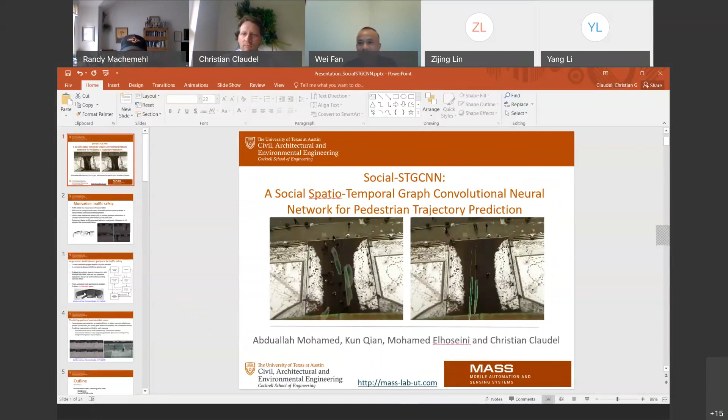As many of you know, CAMMSE is a 5-year multi-campus Tier 1 university transportation center funded by the U.S. Department of Transportation that began operations in November 2016 under the FAST Act. We are a consortium of 5 universities, including the University of North Carolina at Charlotte as the lead, the University of Texas at Austin, the University of Connecticut, Washington State University at Pullman, and Texas Southern University.

Today, we're really delighted to have Dr. Christian Claudel as our speaker. Dr. Claudel currently serves as a transportation engineering assistant professor in the Department of Civil, Architectural, and Environmental Engineering at the University of Texas at Austin. He received a master's and a Ph.D. degree, both in electrical engineering, from the University of California at Berkeley in 2009 and 2010, respectively. He specialized in cyber-physical system monitoring and the use of wireless sensor networks for environmental applications. The topic that he's going to present today is a social spatio-temporal graph convolutional neural network for human trajectory prediction.

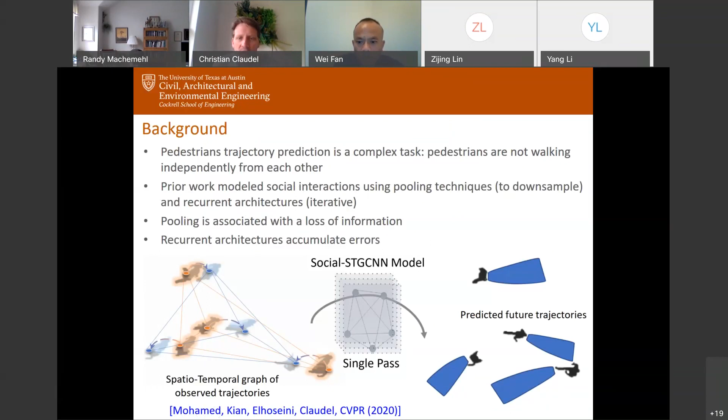We don't use much past information. We don't use what these people did half an hour ago. We use only the past, I believe, 2 or 3 seconds of data, to predict what they will do next. So this is again what I just mentioned, and the interactions of users are modeled using this graph, so that's the key novelty. And then the predictions are done over a certain time horizon, but not frame by frame or with intermediate time steps.

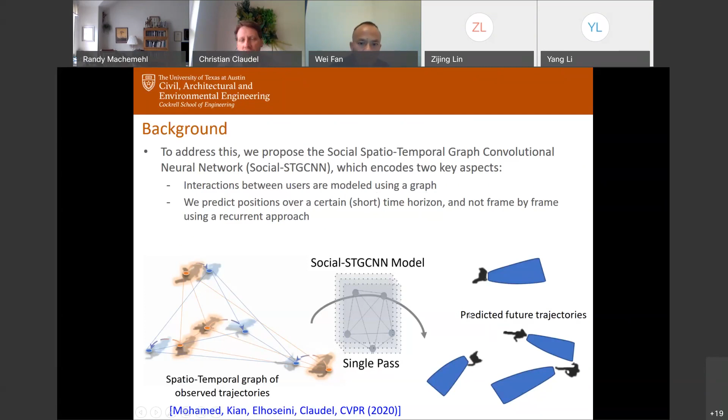We're going to build the graph, so you can see the graph connecting the users at the first time step, then the graph connecting the users at the second time step, and the graph connecting the users at the third time step. And what we built was an empirical adjacency matrix kernel function that would model the interactions between pedestrians. So that's where a little bit all the physical intuition goes.

So we have a certain set of parameters that are in these graphs, edges and vertices. So we have a bunch of information that flows there. And what we are doing is we are using some function to approximate the interactions that they will have. So here we use some information that is based on the coefficients that represent the positions here, but not just the current position. Of course, it represents the sequences of positions as well.

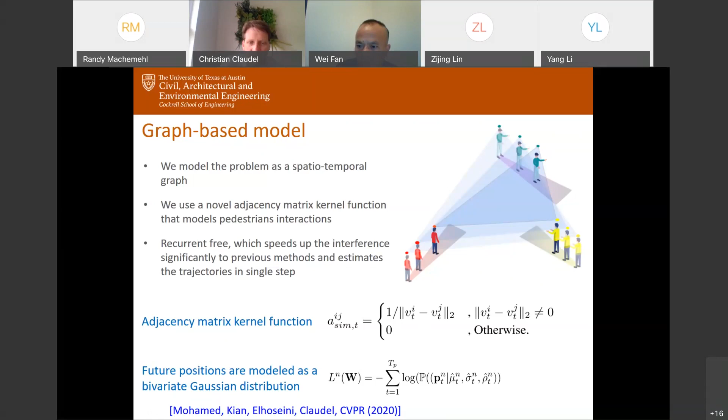And once we have that, we have now a graph of where people are. So then we create this graph convolutional neural network layer. So this is the novelty of the algorithm. And so we embed everything into a graph. We then use the time extrapolator. That was the name coined by my student Abduallah Mohamed.

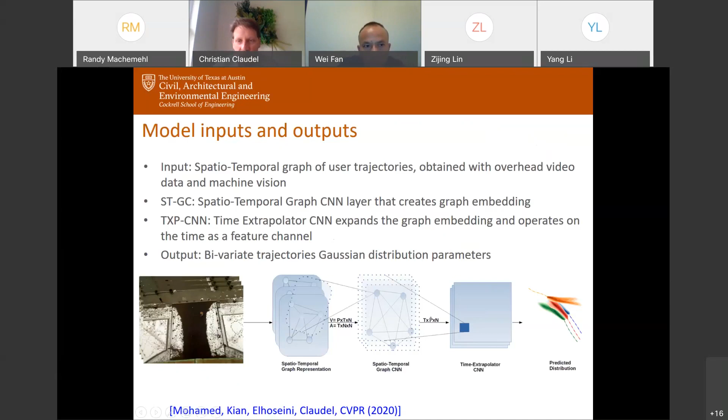And so here the time extrapolator is essentially a way of saying that we are not predicting over a single horizon, but we predict over a series of horizons at the same time. Once this is done, what we get as an output is the predicted distributions. So we start with an input that is just positions. And at the end, what we get is, starting from the position of each user, what are their predicted paths in the future? What are they up to according to the algorithm? Again, the algorithm is not perfect, but that's what we try to achieve.

And then after some time, we try to predict. So we use essentially all this past information of what they were up to that point, to predict now what will be their paths for the future, again, according to the algorithm. So here you can see that we predict that people will keep walking together, and that's something that is reasonably realistic.

Now, just a word about quality. It has been very interesting to see that people in the machine learning community have been working at trying to make this algorithm work in the best way they could, without necessarily comparing to very simple naive methods. And a naive method here is to use people's current position and speed and just keep going forward, saying, okay, let's assume that people keep their speed all the time. Where will they be next? And with that you can predict what people will do next.

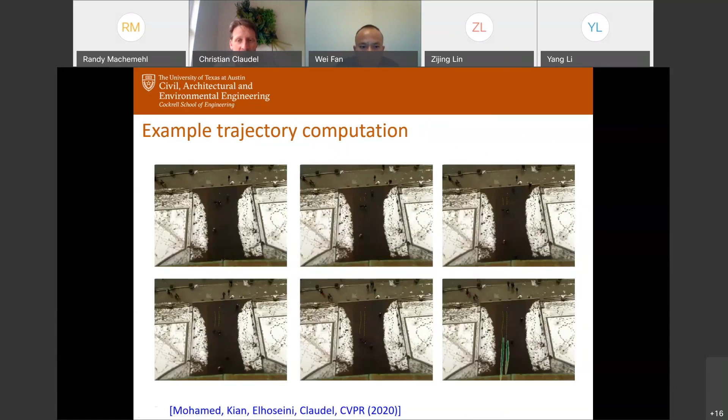And that's also something that was noticed by my two PhD students, Abduallah Mohamed and Kun Qian, when they looked at this problem from a human standpoint. They tried to infer better than the algorithm, and it's actually quite difficult, because many times it was very hard from looking at the video data only to know what people would do next. So there is obviously a limit. I think humans are the best at predicting this. So we have to stay realistic and realize that machines will never be perfect at predicting this. We can at most achieve, I would say, human level accuracy as we progress on this topic.

Okay, so now let's compare this algorithm, Social-STGCNN, with state-of-the-art algorithms. What we did is we took 5 large data sets, corresponding I believe to hundreds of gigabytes or terabytes of data. So that was really a lot of data to process. We extracted all these human trajectories from these data sets using classical machine vision algorithms. And then based on these positions, we measured the performance of the algorithm with 2 metrics. The first metric is the average displacement error, which means that, summing along the trajectory, what was the average error that we are getting in the least squares sense?

I mean, in the norm 2 sense, between the positions that we are predicting and the actual position of the user. So that's the average error. And finally, the final displacement error, sum over all the agents. Here we sum the errors that are at the final time only. So we don't look at the intermediate errors, but we just look at the final error at the end of the time horizon.

We also analyze other things. So things that are important in machine learning are also parameter efficiency. So how many parameters do you need to do the prediction? The lower amount of parameters, the better, because that means it will be more robust and it will also take less time to compute. We also analyze the data efficiency of the algorithm. So that's also something important.

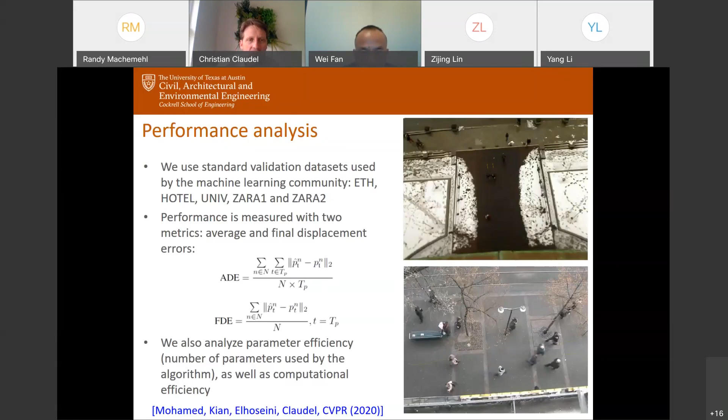So you have this linear algorithm, which is really the simplest algorithm that I just discussed. It amounts to taking the current trajectory of people, the current speed, and then predicting what people will do next. So it's really something very basic and simple. But you can see that the performance is already not too bad. Of course it's twice worse than what we have right now, but it's still reasonably accurate.

Then you can see all these algorithms that were reported in the literature, and the algorithm that we propose has a better performance in average across all these data sets. Sometimes it's not performing perfectly, but in average the performance is definitely better than anything reported. In average, we get a 20% lower error in average displacement error and a 2% error in the final displacement error. Even though it's not a lot, it's still significant statistically, given the metric and the amount of data over which we have tested.

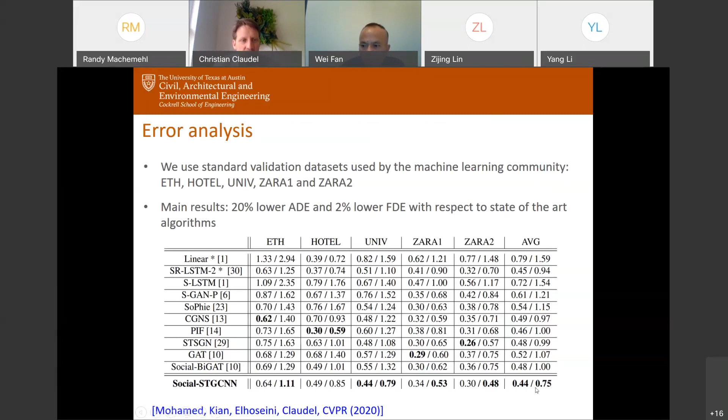The problem of machine learning also is that it's diminishing returns. As more and more algorithms are proposed, it's harder and harder to improve over them. Then we analyze the parameter efficiency and the computational complexity. Parameter efficiency means that we want to have a lower number of parameters. And here, that's really where the proposed algorithm is making a difference. We are a little bit better in terms of error, but the main advantage is that we need much fewer parameters than what other reported algorithms need.

And you can see here that if we compare with the previous algorithm. So I believe there was a question here that was asked. Sorry, let me just go back here. I'm not sure how to access it because I saw some very quick text that disappeared. Okay. So I think I will answer the question probably at the end, that might be easier. Right. So let me just go back to my presentation.

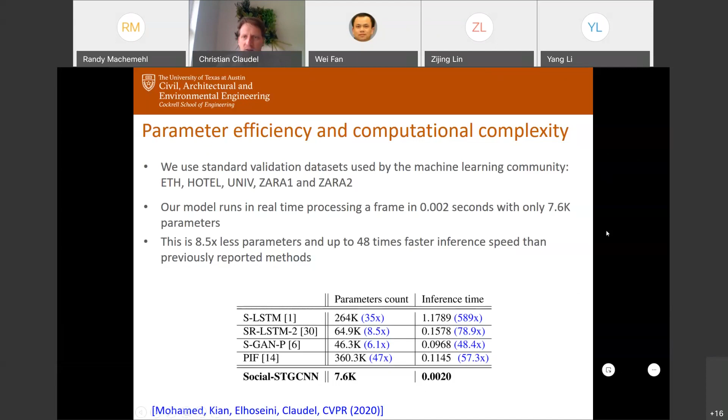Right, so let me just go next to data efficiency.

So I just don't get any feedback, so I'm not sure. Am I still connected? Okay, I see. It seems that everything is connected, but we get the confirmation. Okay, everything is fine. Okay, I can hear something. So good. All right. Sometimes I have internet. I just want to make sure that I'm just in track here.

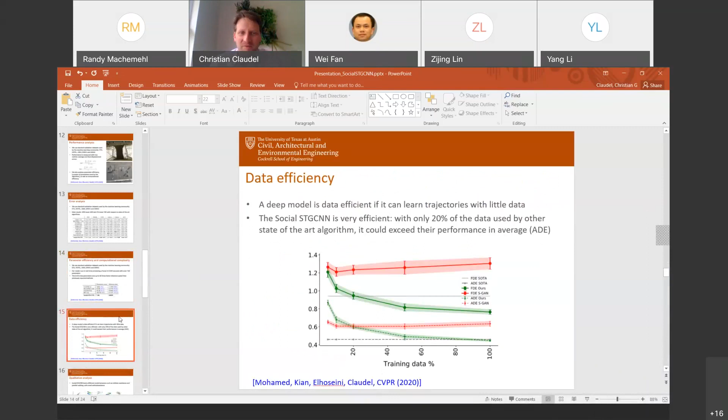Okay, so then data efficiency. So data efficiency, again, is related to the ability for the algorithm to predict with little data. So what we want is the algorithm to learn quickly how to predict these trajectories with a small amount of data. And here, that's also something that is very interesting for the algorithm that we have introduced. We need only, on average, 20% of the data used by state-of-the-art algorithms to exceed their performance.

So, for example, here, we compared this with generative adversarial neural networks. So it's a particular type of neural network that is usually learning faster. So it's really a great advantage of GANs. You start really with a fast convergence very quickly. But you can see that with only a small percent of the data, we already exceed that performance.

So that's really something that was very interesting for us. And we saw that even for a very, very small amount of training data, we already exceeded the performance of the generative adversarial neural network. So it's really some commendable results. So that's for the description of the algorithm.

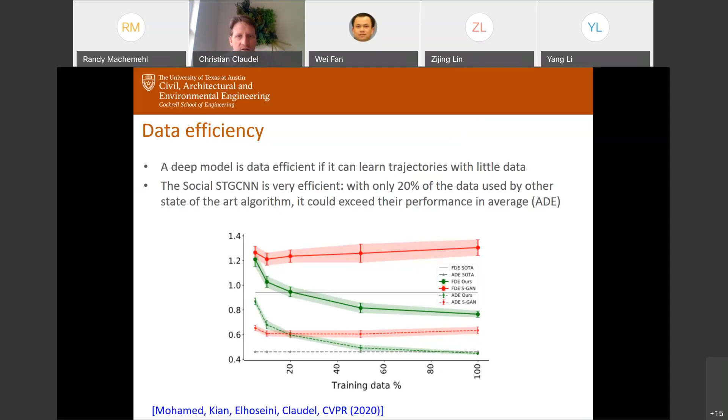Now let's discuss a little bit more about qualitative analysis. What does the algorithm predict in the end? So it's hard to describe everything here. I just made 2 slides to show some example results, but of course it's hard to summarize in 2 slides what happens in tens of hours or hundreds of hours of video data.

Obviously, I don't show here necessarily the bad results, and there are some bad results in machine learning. Because it's a black box, it might work very well 99% of the time, but there might be some errors the rest of the time. And we all know that autonomous vehicles, for example, are not perfect because they might work very well in demos, but it may be that if you have the right sequence of events, the machine learning is giving you very, very bad advice or a very bad prediction.

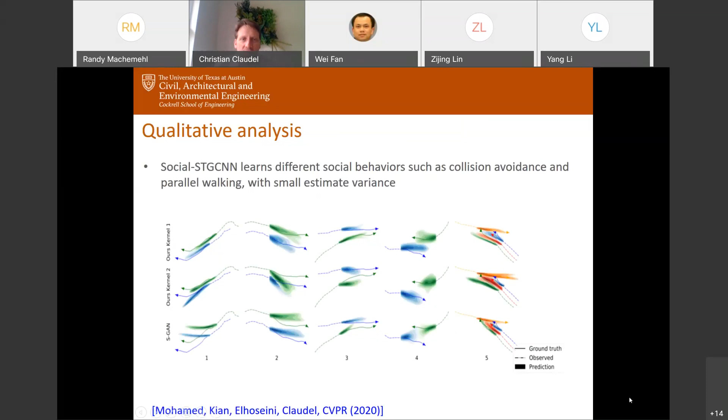And we can also model more complicated interactions with multiple users, where we see also that people tend to move away and people here tend to walk together, but again, not colliding like what is predicted by the SGAN algorithm, more something where all 3 people here are walking together and steering clear from that person walking in the opposite direction.

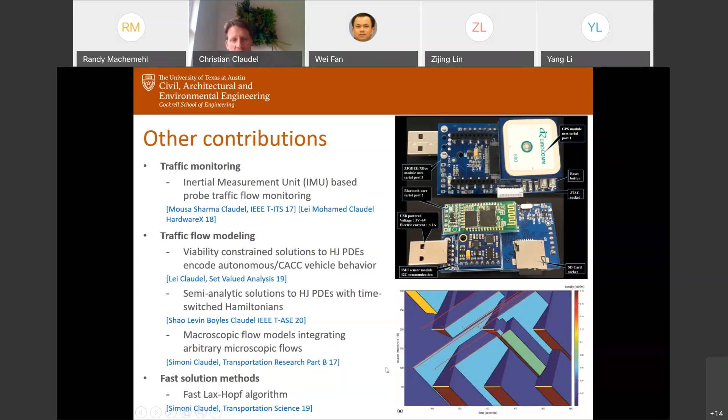Applications of this work that I just mentioned. So this is state estimation, how to estimate the state of traffic on the highway. It's again a density map, and this is space and this is time. So how to predict based on measurement data, how to control traffic.

So we have worked on optimization of delivery vehicles, of buses. So here this is modeling bus bunching and trying to minimize bus bunching using again PDE flow models, and how to control them in real time so that they don't bunch. We have worked also on other control parameters, more control of flows, so how to do boundary control or control of speed limits to optimize traffic flows.

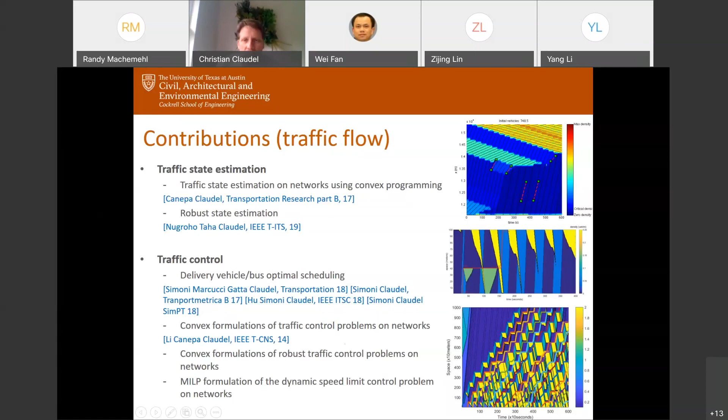Now, more closely related to what I'm showing here, we have also worked on the control of unmanned aerial vehicles for some applications, and this application is flood monitoring. There are lots of people that have worked on UAV control for traffic monitoring. In fact, we have worked on this as well with Professor Boyles at UNC. Here, this project is more about how to use a set of UAVs and how to control them for floods.

So it's somehow related to this problem that we had here. However, it's a control problem. It's not an estimation problem. We try to control agents now, and we don't try to estimate what they'll do next. And the big difference also is that here we are using a partial differential equation to model the flows. So this is the watershed of Austin.

And we try to use here the partial differential equation, the shallow water equations that describe how the flow will propagate in the river here, and we try to essentially use that information together with the topography map to determine how you should steer the UAVs.

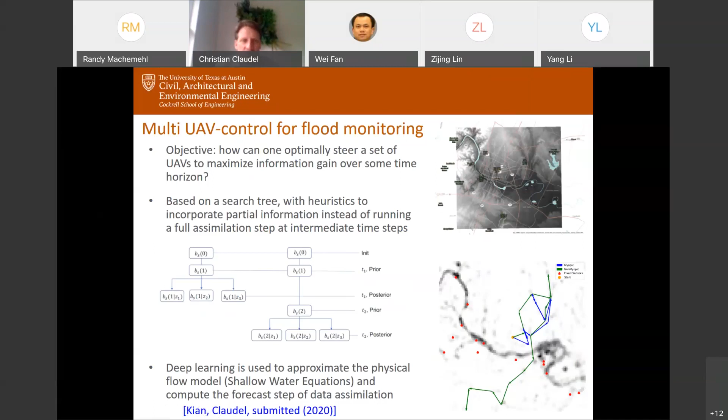So if you have a set of UAVs that sense floods, how should you steer them to maximize the information that you gain over some time horizon? So imagine that you have a flood that's coming. You don't know if there is a flood at all, but you have just 5 UAVs. How should you assign their path in order to maximize the information that you will get, for example, over 10 minutes, and to get the most complete, most accurate map of the current situation, right?

Some other research works. So here, the Hyperloop team of UT. That's something that is in parentheses, obviously, because of the COVID, but we had worked a few years on how to make Hyperloop systems. We have participated in 3 competitions of SpaceX in the past 3 years. And actually this year's competition was cancelled by SpaceX way before the COVID situation. So I don't know if they predicted that in advance, but this is really surprising. So we couldn't participate in this competition.

This year there won't be any competition, but we hope that there will be competitions in future years, and we are still working on how to make a pod that is using air bearings. So it's one of the few pods available that use compressed air to try to float and to be essentially a system for transportation.

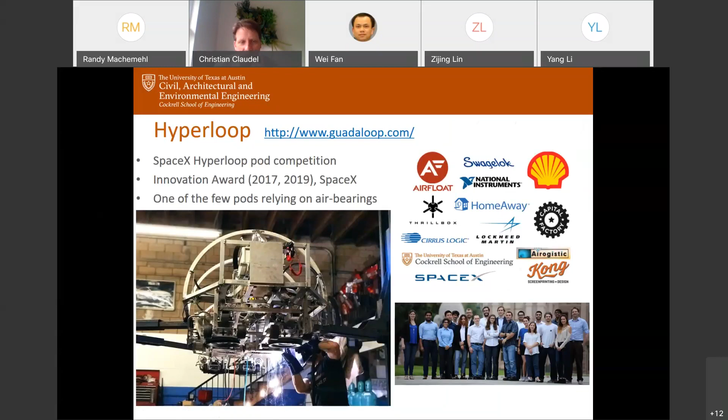All right, so now let me just quickly conclude this work. So what we presented here was the Social-STGCNN, an algorithm that can be used to predict trajectories in the future, to predict pedestrian trajectories, of course, in this work. But what we would like to do is to extend it to any other application. So predict what drivers will do, what bicyclists will do, what other modes of transportation will do.

Of course, in the case, for example, of drivers, you would have more information potentially that would come from the car itself. For the pedestrians, we only can get information from cameras that are filming overhead. But for other vehicles, we could also share information, because all these new vehicles are filled with sensors. You could have also information from the driver itself, because with inside cameras in a car, you can know what people are looking at. You can know their head motion and so on and so forth.

So with all this information, you potentially have even more accurate predictions of what drivers will do than what we can get with pedestrians. Each time you get more information, you get a system that is more efficient and safer. So what we want to do is to implement this algorithm in the future to try new paradigms. And we also want to extend this algorithm to partially controlled situations. In the situation that we had here, we don't know what the pedestrians will do next, or what they are supposed to do in the future.

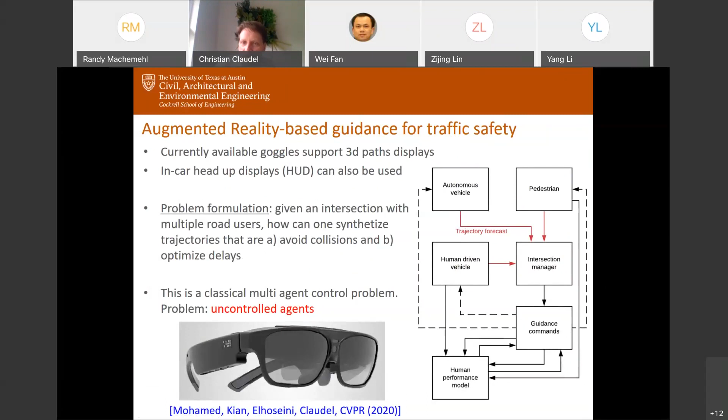However, if I go back to the original slide here, remember what we want ultimately is to have a system that is controlled. We want to have an intersection manager that issues guidance commands, and the guidance goes back to everyone: to autonomous vehicles, to driven vehicles, and to pedestrians. So here, if you have a pedestrian that has some guidance information, how can you now know what they will do next? You know what they are supposed to do next. You tell them, go there. But what are they going to do next?

Between what you should do and what you will do, that's not the same story. And you have some slight deviations. Obviously, you have people that don't track their trajectory very well. You have people that will do something else, that will forget about it. You have the same issue for drivers. If you tell drivers what to do, there are some people that are distracted, that are not paying too much attention, or some people that are just not very good at driving, that will not be very accurate.

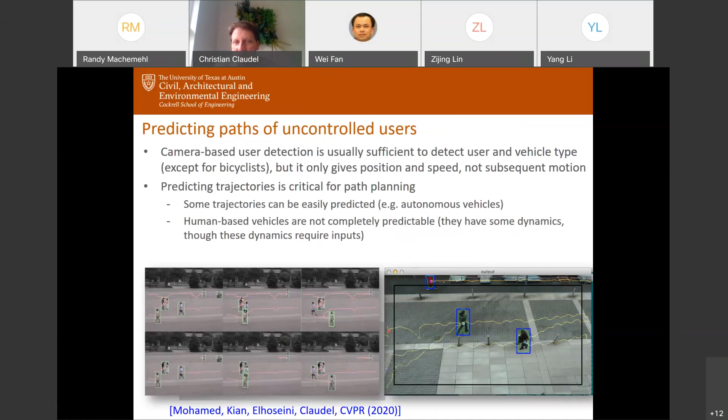So all this information is something that we would like to predict as well, because that's the second part of the system, predicting what people will do when they are supposed to be controlled. And if you put them together, now you can have even more realistic and more accurate trajectories and potentially increase the performance of the system. That concludes my presentation for today, and I'm ready to answer any question.

Okay, thank you, Dr. Claudel. It's a great presentation, huh?

I think we have one question here. I think the question is, how did the model include the interactions between pedestrians? Is it possible to revise the predicted trajectory of pedestrians in order to account for the collision avoidance behavior among pedestrians when there is a conflict between them?

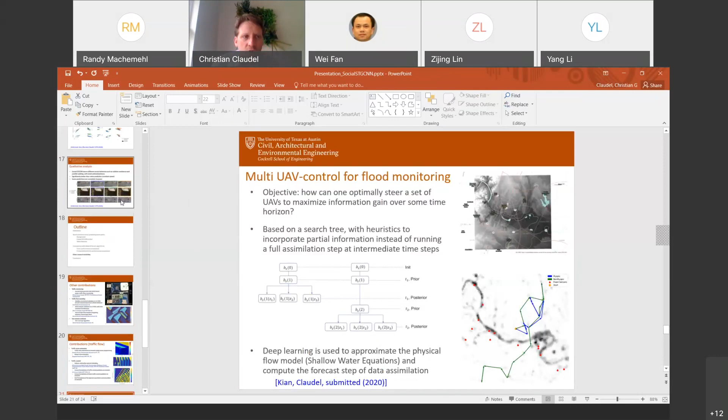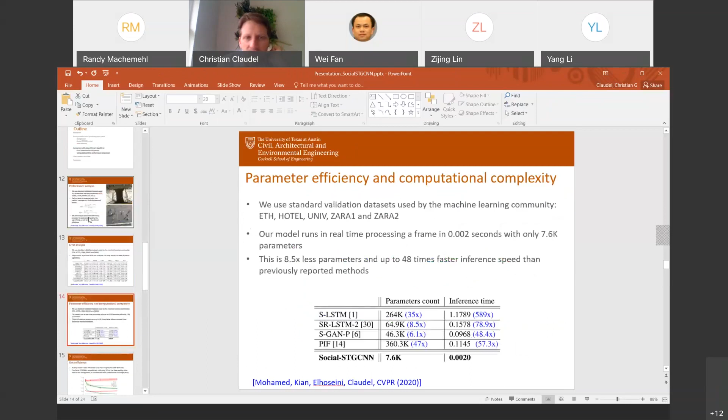Yes, so we take that information into account, as I showed on this example here, for the qualitative analysis. We try essentially to learn these social behaviors, the collision avoidance and parallel walking and other behaviors as well. So right now, these behaviors are taken into account through this kernel function for the adjacency matrix. So if I go back in my slides here, we have these functions that take into account

these interactions. And because we have a sequence of past data that we use to predict the future, we essentially determine if, for example, people are walking together, it's fine, they are walking together. If people are on a collision course or they are walking on the side, we also have the corresponding information because we have a time varying function here. That's through this information that we try to predict what people will do next.

There would also possibly be other information that we could take into account, and that's also something that we could do in future work, which would be to take into account also simply the scene that we have as well, because there are some cues, some body cues, etc., that people have that also give a lot of what they are going to do next.

So that's something that is very complicated to do with state-of-the-art algorithms, because it's very difficult with currently available algorithms to, for example, detect the gestures and classify the gestures or the head motions and so on and so forth. That's something that you can do as a human very easily, but machines still struggle to do this correctly. But I think that would be a very interesting development if we can achieve this.

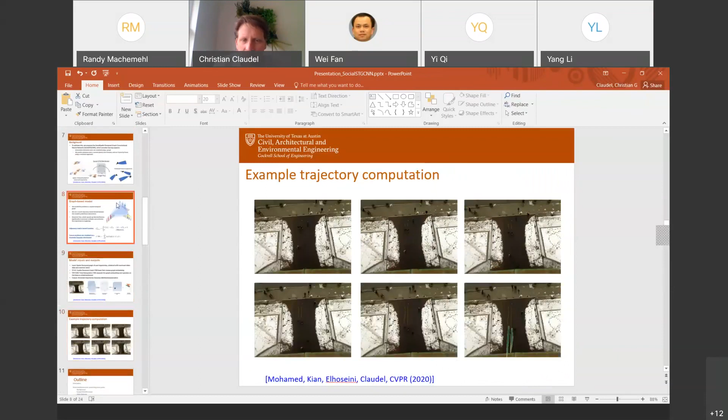It's a very interesting research, and I think it's also very challenging, right? As predicting human beings' behavior is not easy. So I have a small question about when you build your model, because you introduced the background, the overall motivation for your research is to try to use your results on collisions in the future when we implement the autonomous vehicle, because autonomous vehicles will interact with pedestrians.

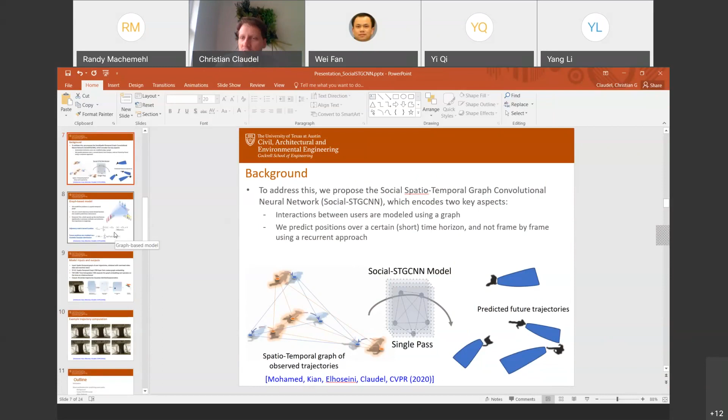So my question, do you think about the impacts of vehicles on pedestrian behavior? When the vehicle is close to the pedestrian or approaching the pedestrian, their behavior may be different. For example, they will be closer to each other, try to yield to the vehicle. That's right. That's a very good question, and in fact, that's related also to this. I mean, that was our primary motivation to put this adjacency matrix kernel.

Even though, unlike what you mentioned, we haven't tested that in a situation where we have a mix of pedestrians and vehicles. But we expect that with pedestrians and vehicles, through a proper adjustment of this function, we could take into account the interactions with vehicles, and for example, the fact that people are afraid of vehicles, especially when vehicles are closing in fast. All this information, I believe, could be encoded by the same type of adjacency matrix function.

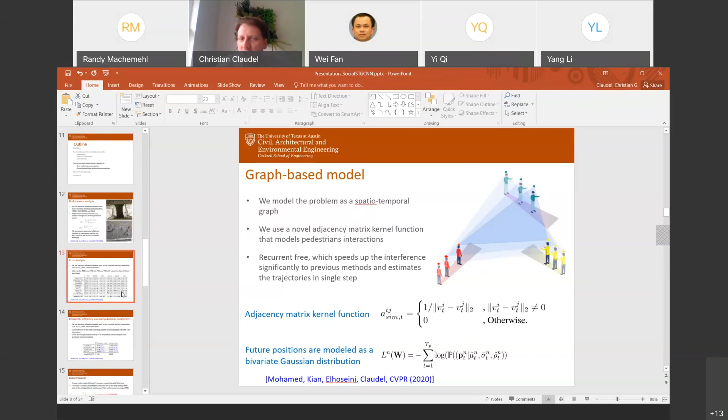The only problem is that we couldn't test it very well because everyone doing the testing in the machine learning community uses these 5 datasets, and these 5 datasets are purely pedestrians. For example, I believe this one was at Stanford, if I remember correctly, and it was just an overhead camera monitoring a purely pedestrian crossing within the campus of the university. So there was no car involved, just bikes and pedestrians. But I think definitely that would be a very important thing.

That's where I believe learning can help to predict what people will do next much more accurately than simple naive models that would take into account just the current speed and positions. Because we all know that even if you haven't seen the car, as soon as you hear something, you see something in your vision, you're gonna move back, and that's something that can probably be learned as well.

Thank you. Very interesting. Thanks.

Okay, thank you, Dr. Qi and Dr. Claudel. I think we have one more question, which Brandon raised. So have you looked into multimodal output?

Multimodal output. So here, I'm not very sure that I fully understand multimodal. Oh, you mean in the sense of multiple distributions in the outputs? So not to have a single mode, for example, for the Gaussian. Okay, yeah, perfect. Yes, definitely that's something that we also tried. We tried to use a Gaussian mixture model where we have multiple modes, and definitely that's something critical.

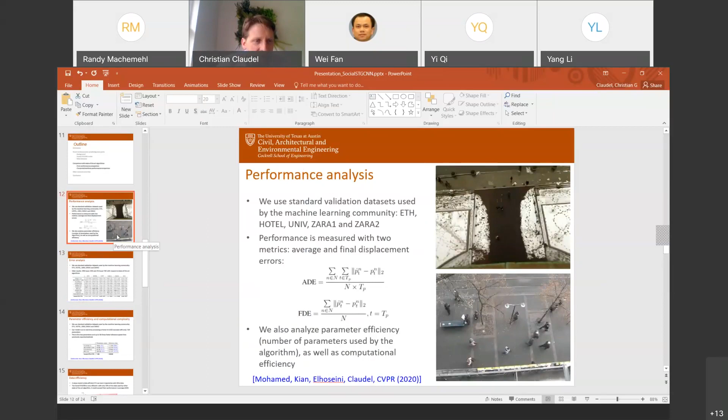But definitely that multi-modal thing is very important for the future. Particularly, for example, if you have someone next to a crossing, are they going to cross, or are they going to stay, or are they going to walk back again? There are lots of situations in which things branch. When you have a bike, you could go straight or you could turn left, and predicting these modes is something that will be critical for the future.

We already use the features in the image. We already use the features of the ground. So we use the ground image that we extract, and those features are important because, for example, if you have a road and a sidewalk, we learn that the sidewalk is for walking, and you can go in or out of the building. So all this is learned, and that's an important assumption.

We haven't tested the situation in which we have a real intersection with ground markings, but we believe that the algorithm should also learn the meaning of the ground markings, and that would also help us determine this splitting. So we can already encode this split into multiple modes through the variation of the parameters and the iteration, but I think it would be better to handle it as a Gaussian mixture model, where we have, for example, 2 or 3 most likely paths, and what are these paths going to be? Thanks for the question.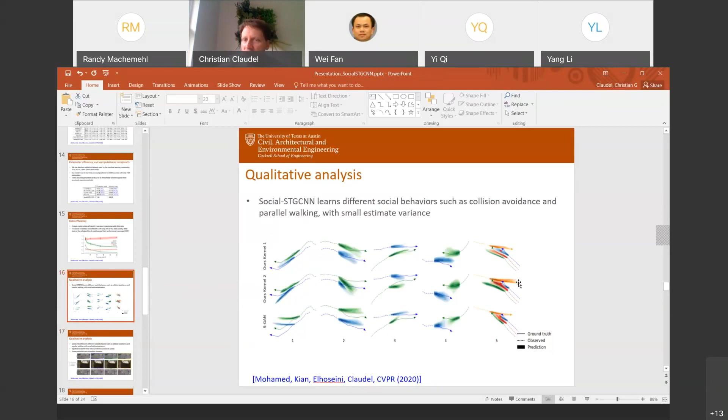Okay, thank you, Brendan. Thank you, Chris. So we do not have any additional questions listed here. So any participant here, do you have any further questions? You can ask questions directly, make it more interactive. Yeah. Sure. Okay. I think I saw just a question from Shauzi.

So the ground truth here that we are using is this complete video dataset. We use the dataset, we extract the position of every user in the video data. And the ground truth for us is to look at what people will do next in the future. So we have the current paths, and in the future people will do some other trajectories, and we still have access to the future because we have the complete video. So we do a prediction at every time step, at every image of the video, but we have the ground truth. We know what people are really doing because we have access to the complete video up to the end. That's how we compare the performance of the algorithm.

So it's like watching a video and stopping at time 0 and then trying to guess what will happen next. Thanks. That's a great question. And so no question here. So any more questions?

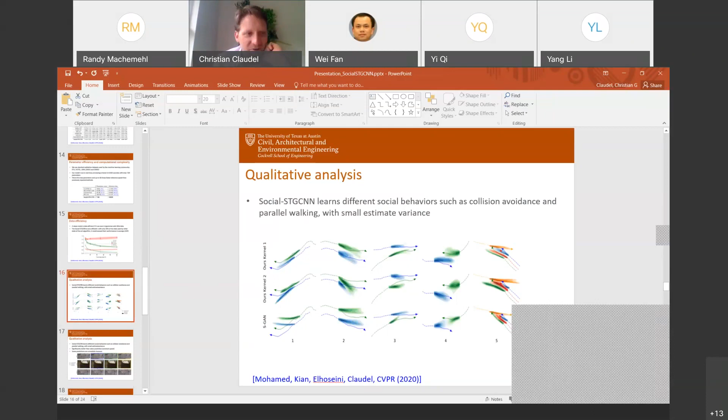We have tried to. Thanks for the question, Randy. And actually, that's a primary motivation. In fact, initially, I started to work more on the vulnerable user side because of the advantage of these goggles. Technically, anyone can wear them, even bicyclists, just like sunglasses. So it's really something very portable to carry. And also, I know that safety is really a concern. A lot of people don't want to use bikes for this reason.

Now, the problem that we have for bicyclists is first the lack of data sets to test the algorithm. If we had good large-scale bicyclist data sets, that would be very interesting for us. I think there might be some data sets, but not that we are aware of, because in the machine learning community, people haven't. So there is this first difficulty.

The second difficulty is that for bicyclists, it's actually difficult to predict the position and the state of the bicycle. I'm not sure if this has progressed, but I know that even last year or 2 years ago, I believe it was like 60% efficiency at capturing position of bicyclists. I'm not sure if in the data that you are using on the bicyclist, you can have some boxing of the bicycle that is very realistic and extraction of the trajectory. But I think that was one of the difficulties we had.

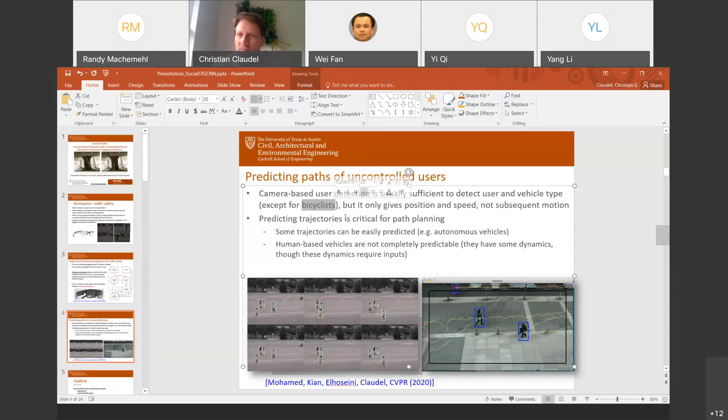Thank you, Dr. Machemehl. So there's one more question here. Sure. So I saw a very fast question, but I couldn't read it. Sorry. Do you have it somewhere? Yeah.

Other than the neural network-based models, will there be any chance that tree-based models can be developed to solve the problems? Yeah, that's a very good question. We haven't investigated tree-based models, but yes, there should be some potential there as well, especially because you have also some divergence, some branching.

We tried namely convolutional neural networks because it was what most other people have been using, and CNNs have the advantage that they have worked well for image recognition. So we wanted to try to extract some robust features that could be used to somehow boost the trees, to make sure that you get reasonable accuracy and reasonable robustness, so that your tree doesn't grow too much. We haven't investigated this yet, but definitely that's something that could be of interest.